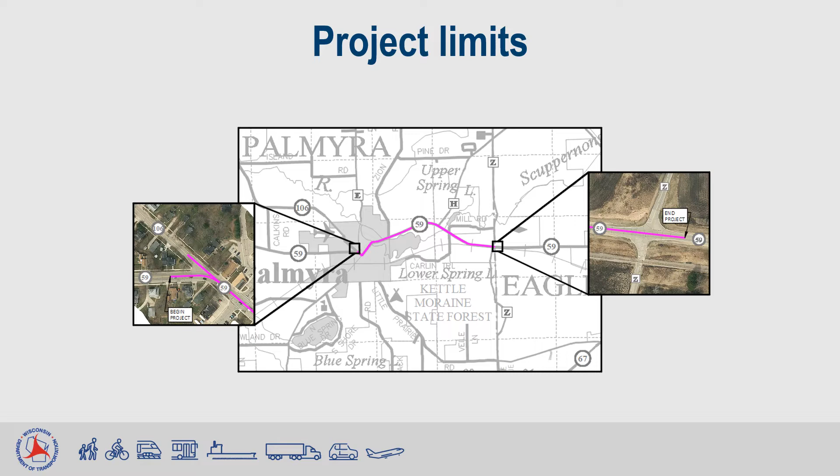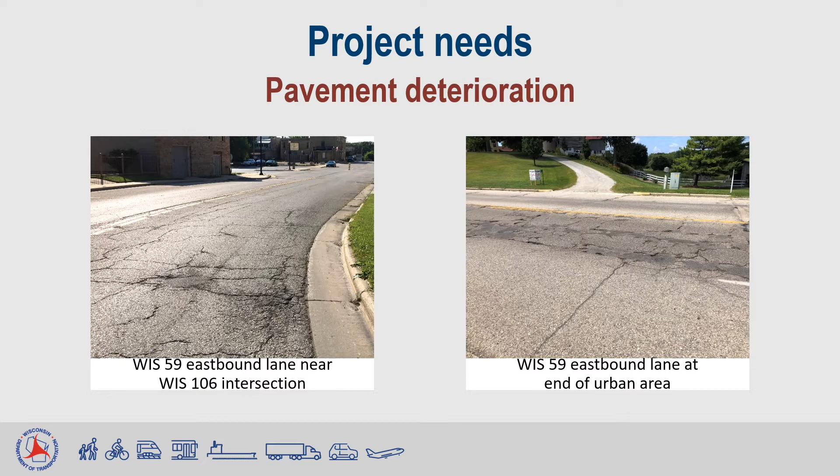Pavement along 59 is deteriorating with extensive cracking and rutting, as shown in the photos. The existing pavement has caused poor ride quality and allows for water intrusion, which can weaken the underlying base material. Curb ramps located in the village of Palmyra along 59 are not compliant with the standards of the Americans with Disabilities Act, known as the ADA. Some substandard aspects include steep slopes, narrow widths, lack of a detectable warning field, and utility facility conflicts, as shown in the photos.

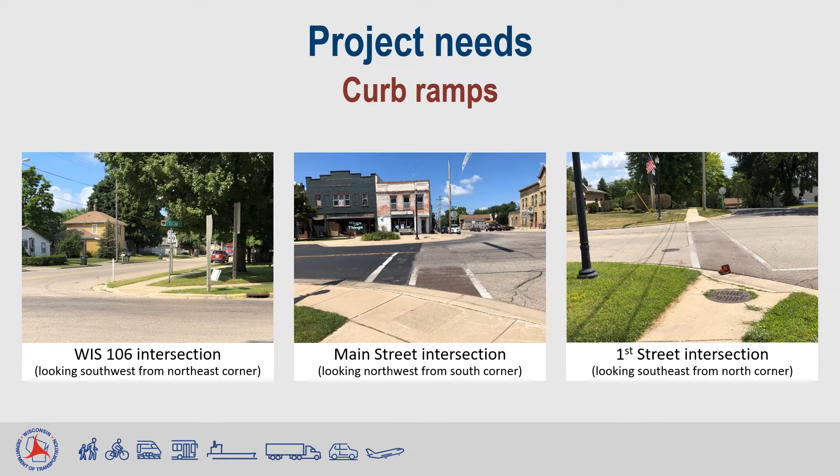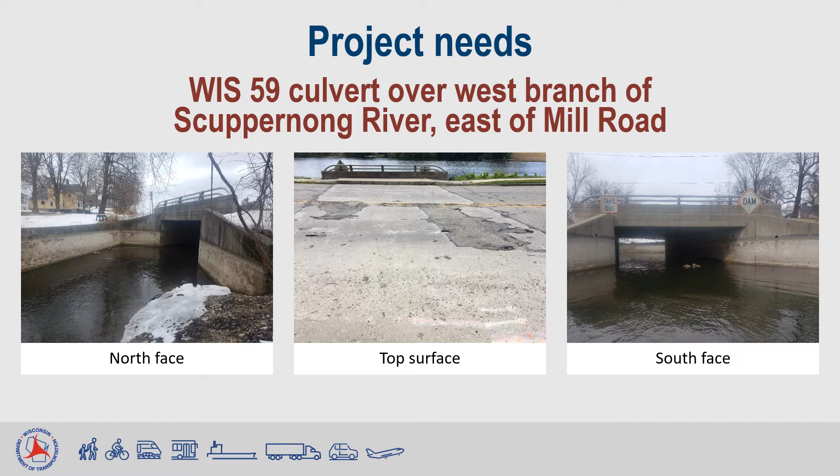The culvert structure along 59 just east of Mill Road over the west branch of the Scuppernong River has numerous deficiencies. The top surface has many delaminated areas, long cracks, and spalls. The bridge rail has many concrete pop-outs and cracks, and most of the wing walls are tipping inward. Also, the sidewalk on the structure is not compliant with ADA standards.

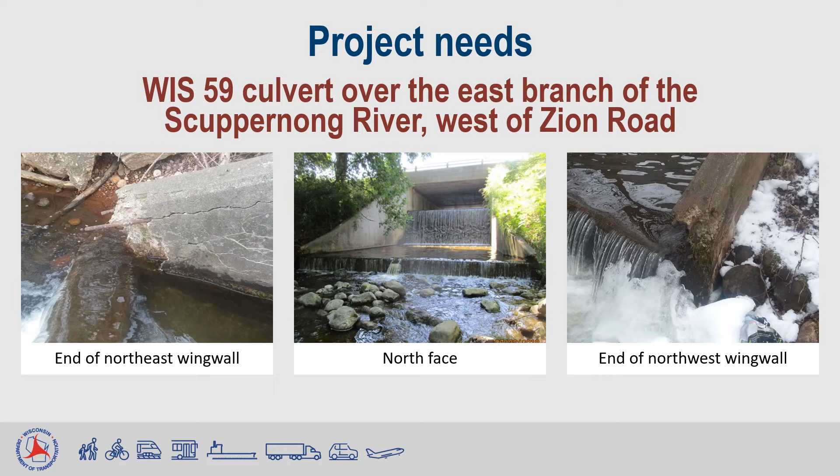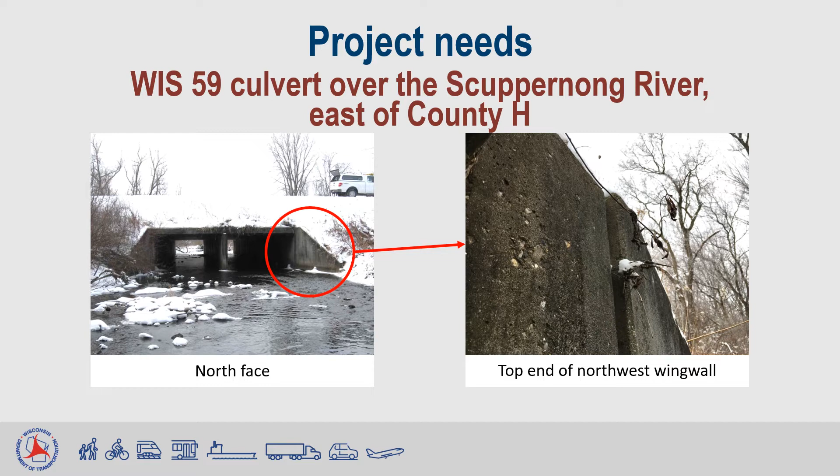The 59 culvert structure over the east branch of the Scuppernong River, west of Zion Road, needs a deck overlay and repairs to the wing walls on the north side of the structure. The existing deck has delaminated areas and extensive cracking, and the ends of the northern wing walls are spalled off with exposed steel rebar, as shown in the pictures. The northwest wing wall of the 59 culvert structure east of County H over the Scuppernong River is tipped inward and needs to be replaced.

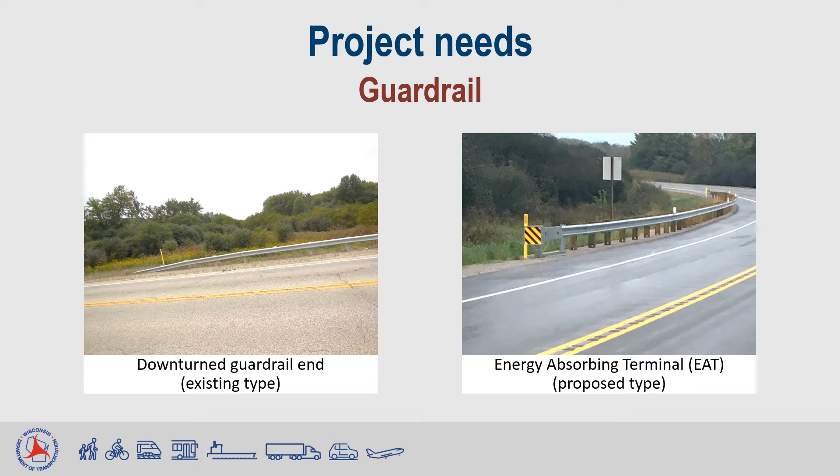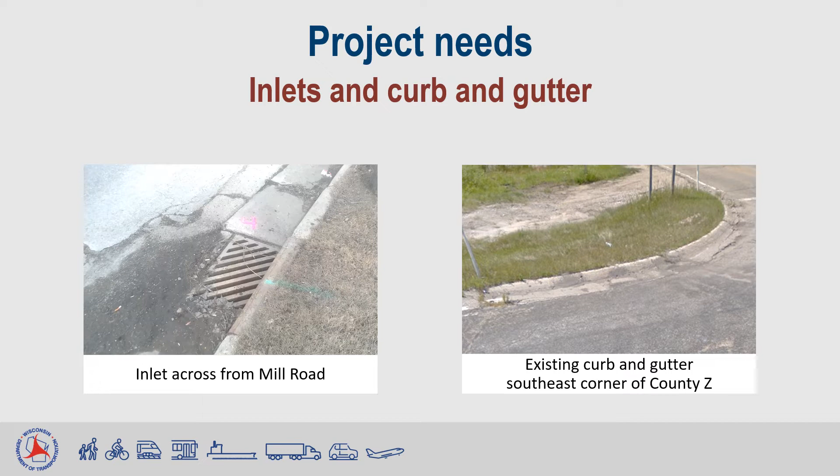Project improvements include resurfacing 59 from 106 to the eastern limits of Jefferson County. Resurfacing will remove approximately 5 inches of existing asphaltic material and pave back 5 inches of new hot mixed asphaltic pavement. The proposed project will also include upgrading the existing curb ramps to better meet ADA standards.

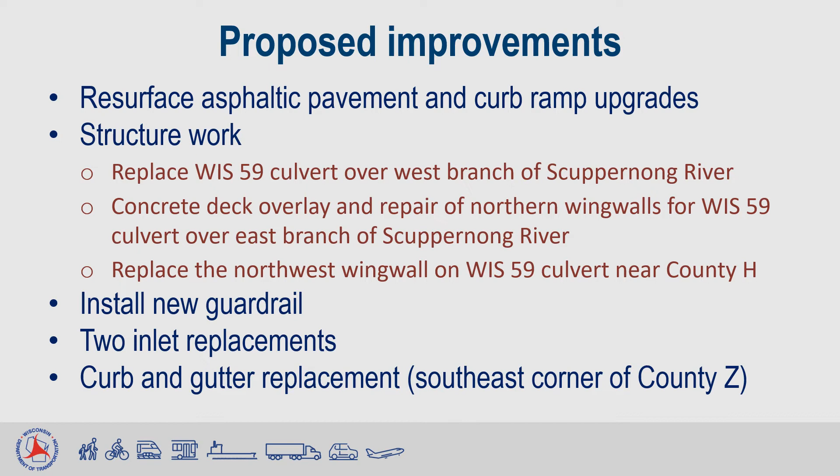Additionally, the project will include replacing the 59 culvert structure over the west branch of the Scuppernong River, a concrete deck overlay and repairs to the northern wing walls of the 59 culvert structure over the east branch of the Scuppernong River, and replacing the northwest wing wall of the 59 culvert structure near County H. Also, new guardrail will be installed, 2 inlets will be replaced, and the curb and gutter at the southeast corner of the intersection of 59 and County Z will be replaced.

During construction, 59 will be closed and through traffic will need to use the posted detour route. The proposed detour is anticipated to use 67, 12, and 59 as shown in blue for both eastbound and westbound traffic. Access to local and business areas will be maintained via flagging operations.

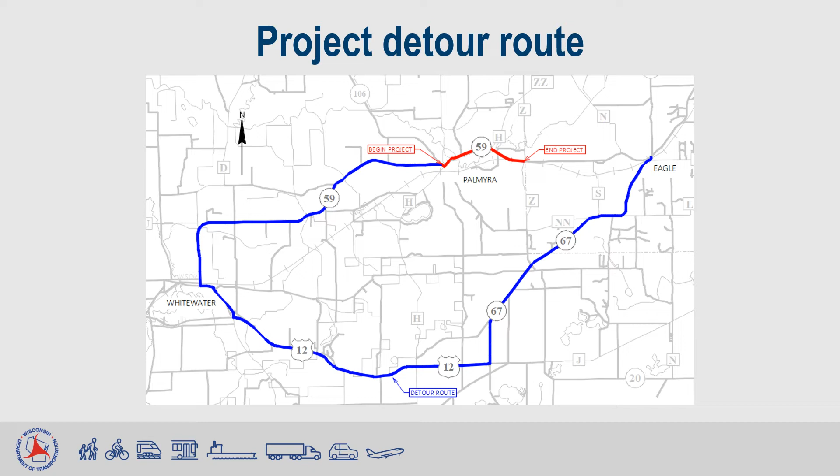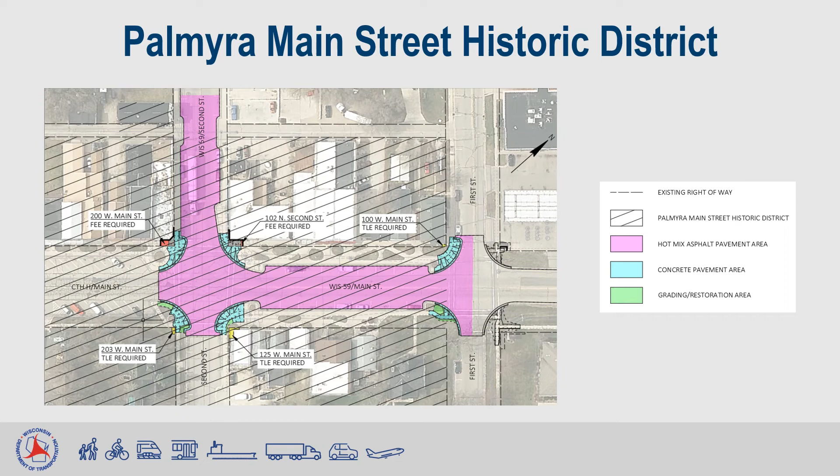There are 2 areas within the project limits that are eligible for the Historic Registry. The first is the Palmyra Main Street Historic District, which is located in downtown Palmyra along Main Street between 4th Street and 1st Street. The anticipated work activities within and adjacent to this historic district include asphalt paving in the roadway, concrete paving for the curb and gutter, curb ramps, and sidewalk, and grading/restoration around the sidewalk as shown. We anticipate acquiring right-of-way within 5 parcels in the historic district. More information will be provided to the owners of the affected parcels when the real estate acquisition process begins.

The second historic area is located at 504 East Main Street. The anticipated work activities adjacent to this historic area include asphalt paving in the roadway, the work on this 59 culvert structure west of Zion Road, as mentioned earlier, guardrail upgrades, shouldering, grading, and restoration around the guardrail upgrades as shown. We anticipate acquiring right-of-way adjacent to this historic area, but not within it. More information will be provided to the owners of the affected parcels when the real estate acquisition process begins.

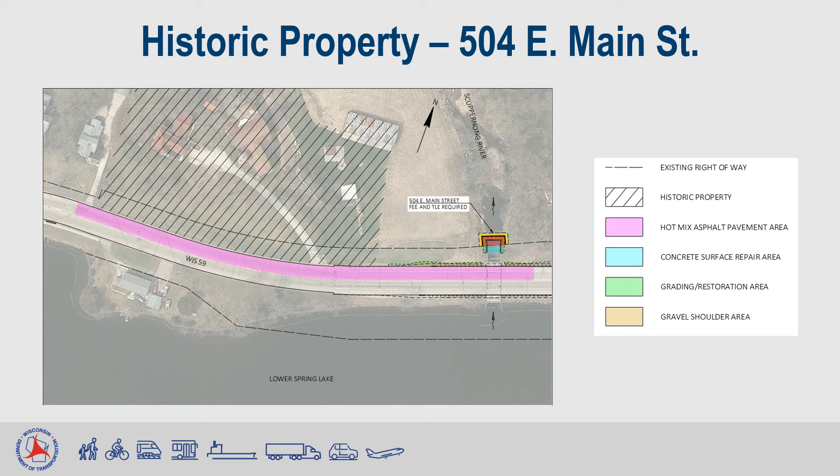For recent milestones, initial coordination letters were sent in 2020 to local property owners and local agencies, and survey data was collected. In 2021, the preliminary plans and wetland determinations were completed. Additionally, the draft environmental report was started. We are currently conducting virtual public involvement. The environmental report has begun, and we anticipate it to be signed by October 2022.

Right-of-way will be needed near most of the curb ramp upgrade locations and structure locations, not the entire project. Real estate acquisitions are expected to begin in January 2023. The plans for the project should be finalized by August 2025, and construction is anticipated to begin in spring/summer 2026.